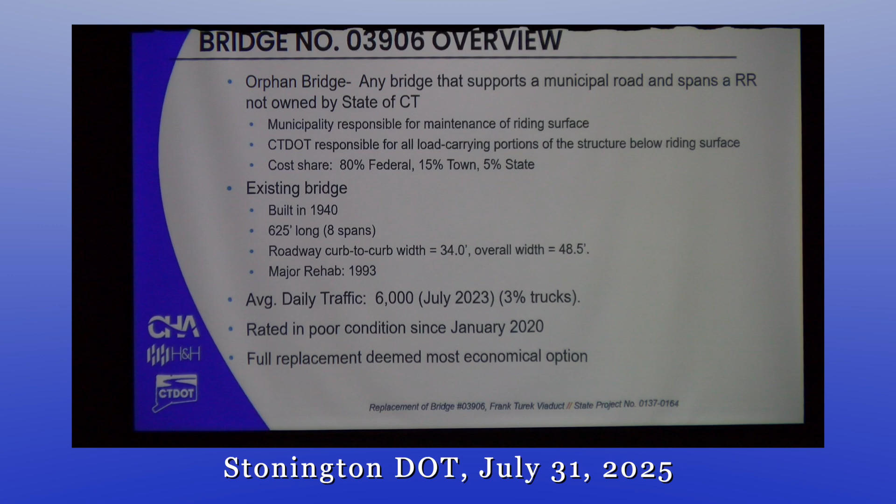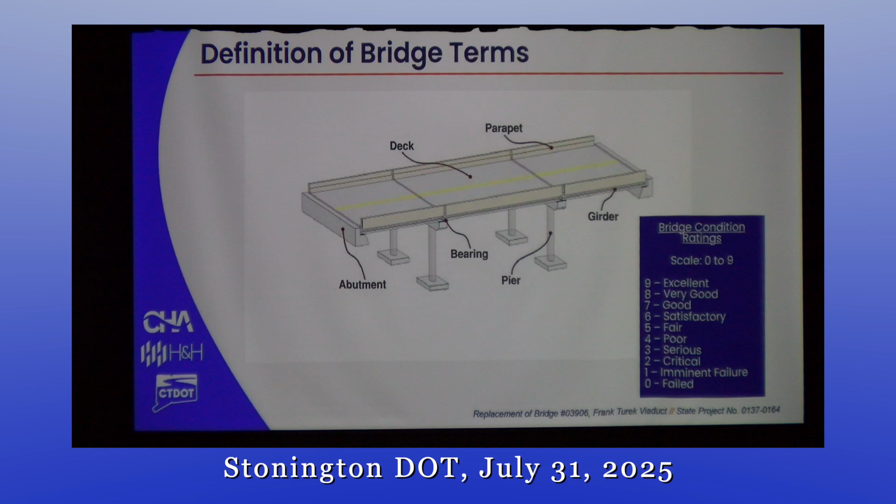I'll cover some bridge terms because I'm going to touch on those briefly. There's a diagram showing some of those major terms. The deck is what you ride on. The parapets are what keep you from driving off the road. The piers are what holds up the superstructure, and that's the part that supports the deck. And then the abutments are at the end. It's rated on a 0 to 9 scale, with 9 being excellent and 0 being completely failed. A 4 is poor, and poor again is still safe, but it needs work.

The purpose of the project is to address all the deficiencies affecting the bridge, so it will continue to provide safe and functional passage to all the users above and below the bridge. We need to address the deficient substructure, increase the load rating factors, address the vertical clearance limitations, update the roadside safety systems to current standards, and keep travel over the bridge, including during construction. Ensure that the bridge itself is safe for now and the foreseeable future, and minimize the need for future maintenance. After this, we don't want to be back anytime soon.

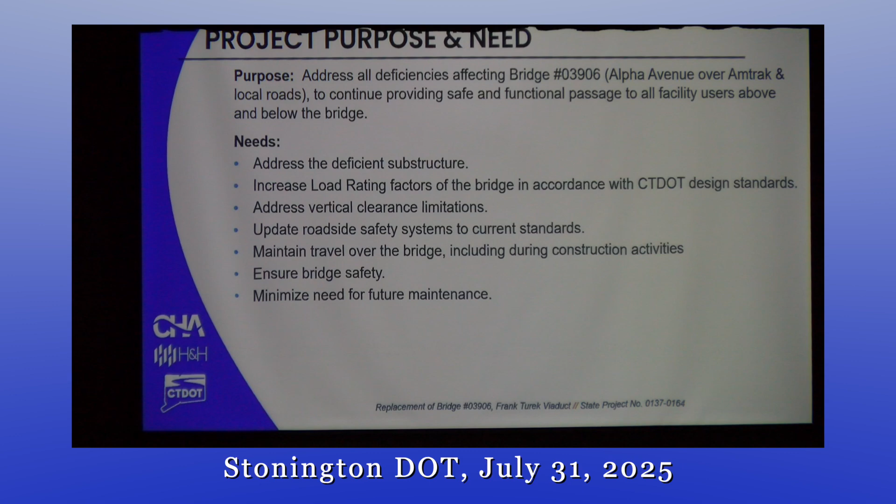The existing conditions on the bridge deck: the overlay is in satisfactory condition. The deck is rated as 7, which is good, but that's based on a little bit of guesswork, because when you have an overlay over a bridge deck, it's hard to judge the actual condition of the deck. You can't really tell until you strip the overlay off. But there is some water seeping through the deck. That's the efflorescence you see in the bottom photo. That means water is seeping through the bridge deck, and water going through the bridge deck can corrode the rebar which holds the deck together.

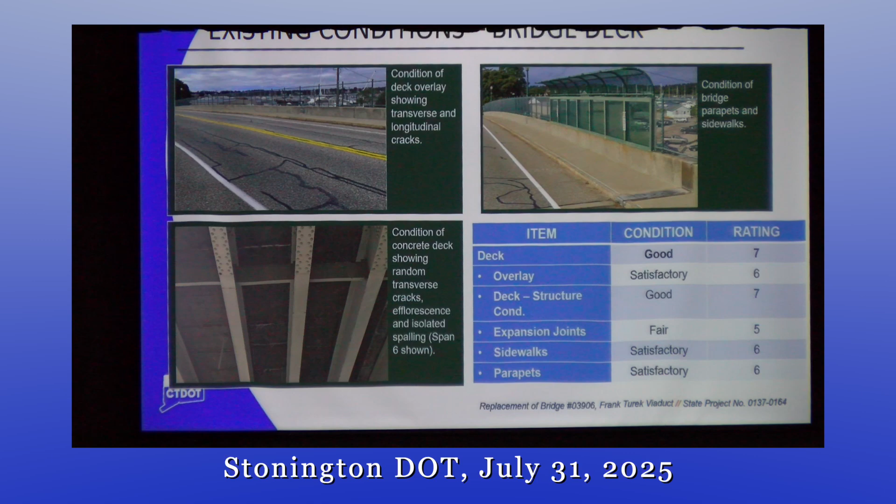The superstructure is in fair condition. That's one step above poor. There is damage to the girders caused by arcing from the Amtrak catenary. There's isolated corrosion damage. There's enough section loss to drop the rating to fair. And in about 10 years, the bridge is likely to become poor. So we want to address the bridge now before it becomes in poor condition.

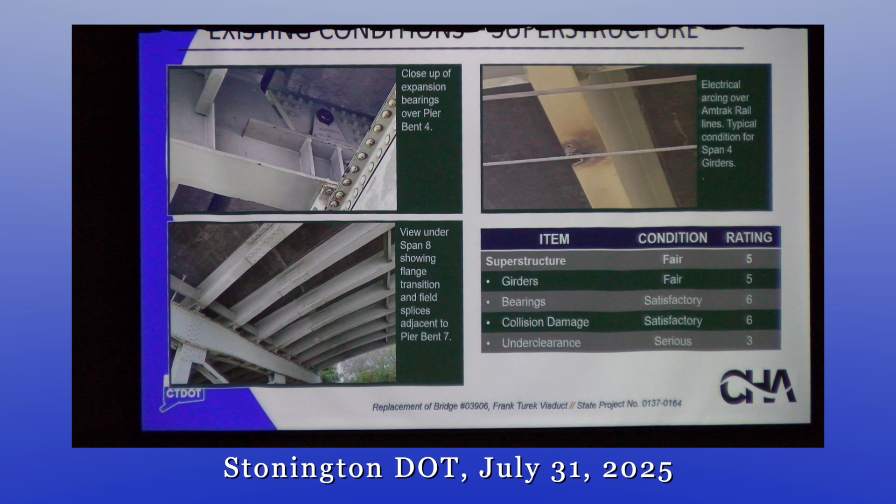The substructure is really what's driving the project. There's a lot of corrosion on the piers, and those are original 1940. The superstructure and deck, I believe, were replaced in the 1993 rehab. But right now, the original components, the piers, are what's failing at this point.

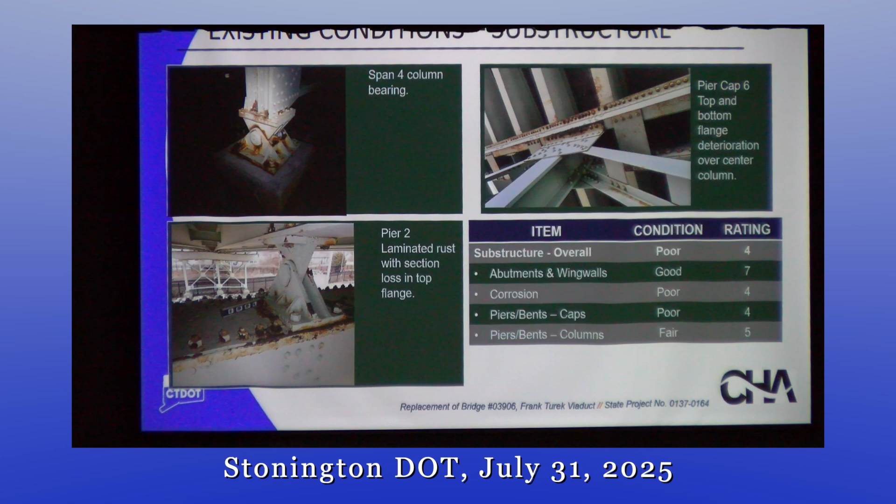It's a little difficult to compare a lot of these options because we spent about 4 years from the start when the bridge was identified in poor condition till now. So I had to adjust some of these numbers for inflation because a lot of the early options we looked at dropped and we added new options later on, so I had to kind of equalize their cost in dollars as of February 2025.

We had an initial rehabilitation study report, and in that one, it looked like alternate 4 was going to be the best option. Unfortunately, alternate 4 would require the closure of Main Street and Cutler Street where they cross under the bridge.

The reason why it's so much cheaper than the other options in the long haul is because it would be a much shorter bridge. It'd be only 200 feet long. But when we met with the town, they said the impacts of closing the roads would be unacceptable to the town. So we went back to the drawing board and we came up with alternate 5, which still assumed that we were going to use alternating one-way traffic to handle traffic during construction.

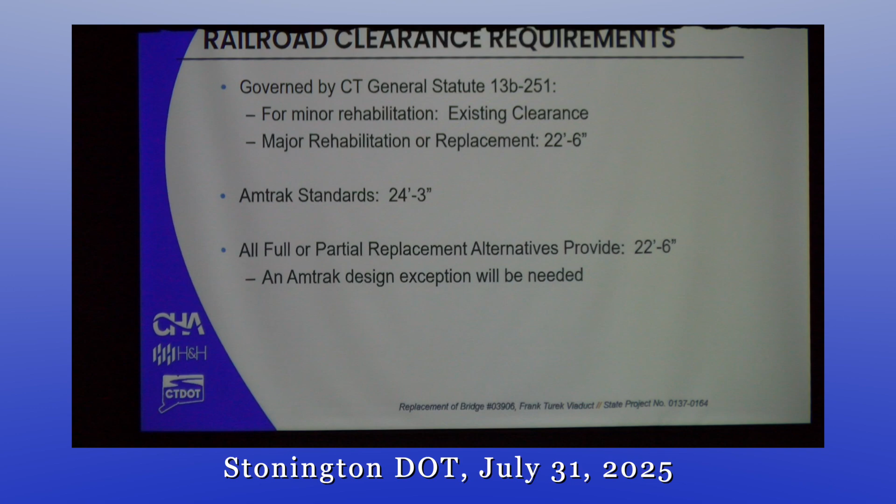Yeah. Can everybody hear me all right? Okay, I'm going to bend over then, I apologize. I guess I'm holding it.

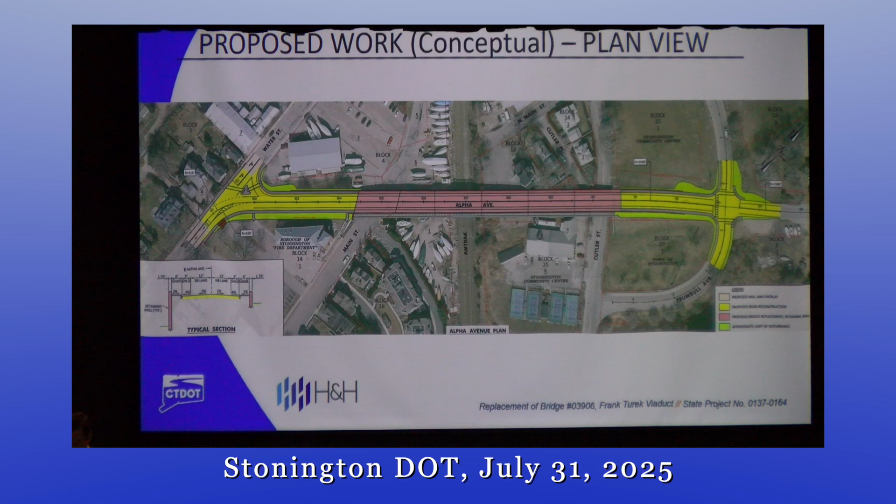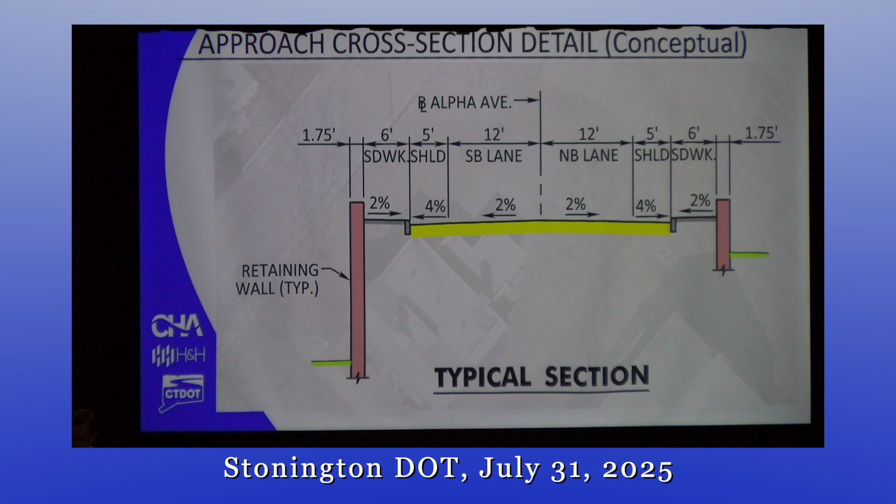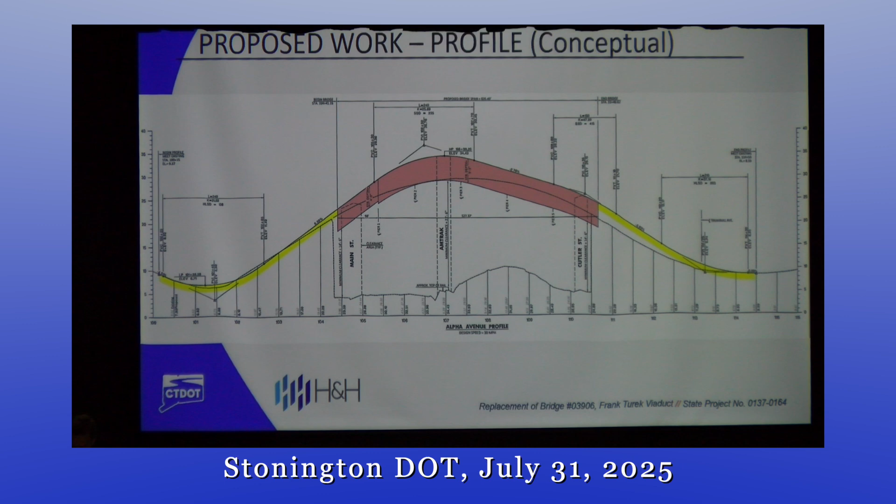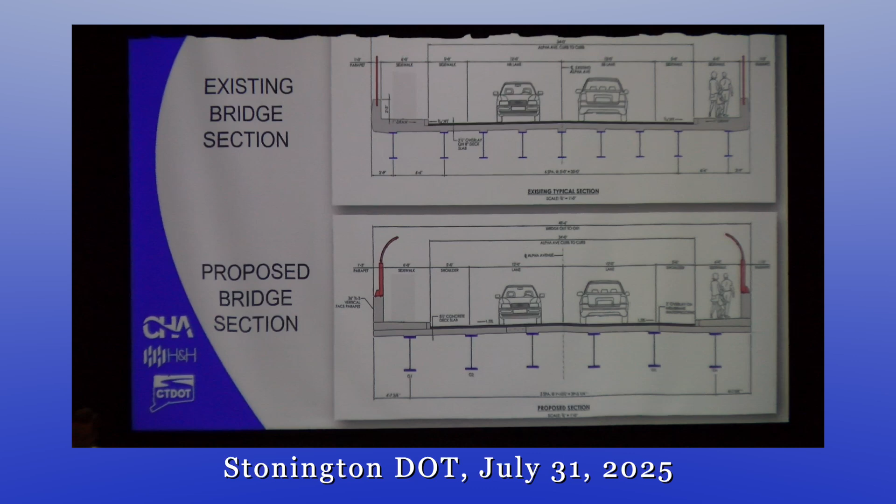And as I stated, the footprint of the existing bridge is going to be roughly the same as the proposed. It's just shifted 12 feet to the west. And that's mostly to accommodate the needs of maintaining a lane of traffic in each direction through the duration of construction. 12 feet or 12 days? 12 feet.

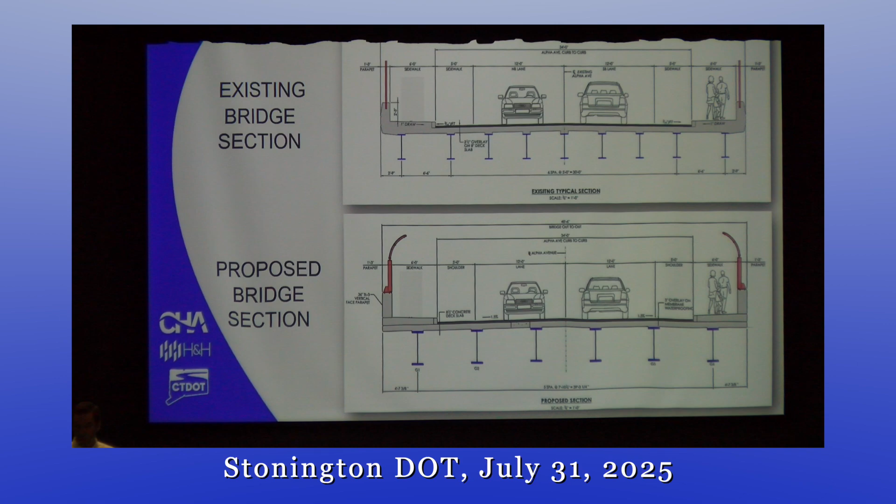Thank you, Brian. For bicycle and pedestrian facilities, the design meets or exceeds all Connecticut DOT complete streets requirements. For sidewalks, it would require a 5-foot minimum sidewalk with marked crosswalks. We are proposing to have 6-foot sidewalks on both sides, which is the same as existing, with marked crosswalks and illumination where the crosswalks are. There are no transit facilities within the project limits, but the bridge piers will be located to provide room for a potential Shoreline East train station. There was a feasibility study a while back.

To select the bicycle facilities, we had some questions about how the bicycle facilities were chosen. We consider both the traffic volume and the posted speed limit. Alpha Avenue is anticipated to carry 6,400 vehicles per day in the design year, which is 2047. The posted speed limit is 20 to 25 miles per hour. For that combination of volume and speed, because there are no bike lanes in the area, a paved shoulder meets the guidelines.

For bicycle and pedestrian access during construction, the stage construction that we're considering would require closing the sidewalks to use the sidewalks as travel lanes so we can shift the traffic over. So two options are under consideration to handle pedestrians while those sidewalks are closed. One is a detour to Elm Street, which would require the addition of ADA compliant ramps to the Elm Street pedestrian bridge, and also filling in a short section of sidewalk along Cutler that's currently missing.

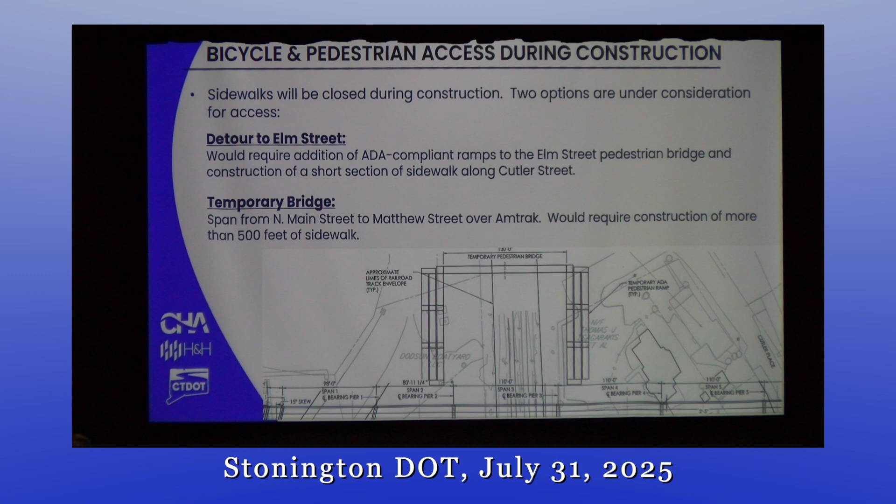The other option is a temporary bridge which would span from North Main Street to Matthew Street over Amtrak. That would require construction of more than 500 feet of sidewalk. Because there's an accessible route now, meaning a hard surface route, we need to provide a hard surface route that is equivalent to what's there now.

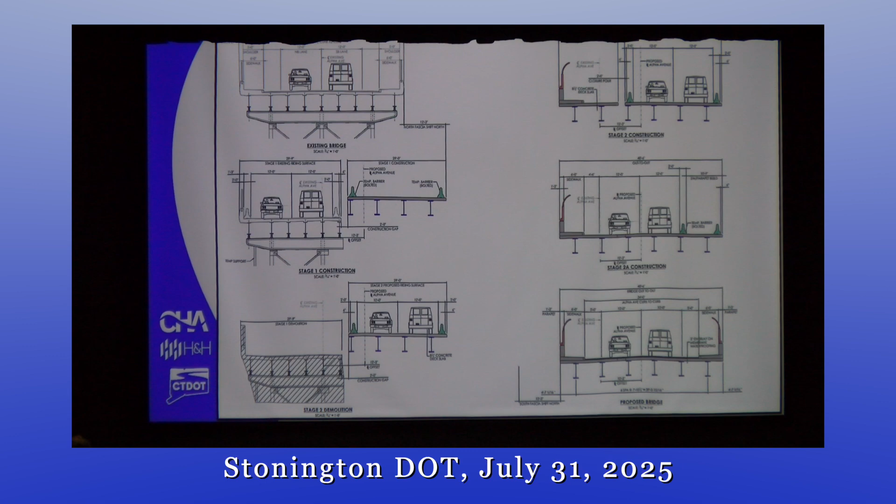Construction staging. The north side is sometimes also referred to as the west side because we call the project as running north to south, but it's really at an angle. Initially, we would start construction by shifting traffic over to the east side of the bridge, demolishing the west third of the bridge, building a new bridge alongside there, and then we shift traffic over to the new section, demolish the remaining portion of the bridge, and put traffic back on that structure.

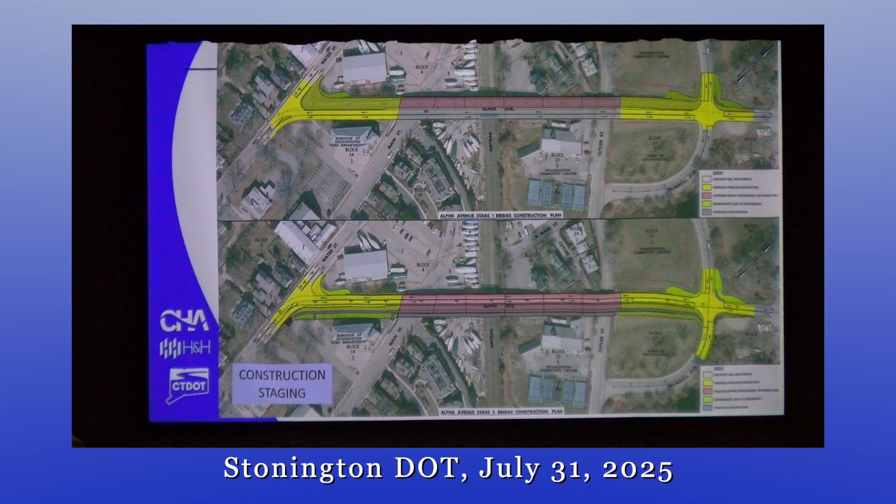There are several considerations, as I mentioned earlier. The initial designs were based on alternating one-way traffic during construction. We also looked into reopening the Water Street grade crossing, but it was requested and denied by Amtrak. Local emergency officials expressed concern with the traffic backups that we would have during alternating one-way, which led to taking traffic counts in July of 2023 and then some modeling based on those counts.

Alternating one-way traffic would simplify the project. We wouldn't need temporary pedestrian accommodations, and it would reduce some rights-of-way impacts because the final bridge would end up pretty close to where it is now instead of shifted over 12 feet, but it would have very severe traffic impacts.

With alternating one-way traffic, all movements at both intersections, that's Trumbull Street and Water Street, would have level of service F. Now, level of service is like grades on your report card. They go from A through F, and F is failed. That's all turning movements, going straight, turning right, whatever. Level of service F. Delays up to 5 minutes, traffic backups up to 1,600 feet. And the person who modeled this warned us that when the backups get like this, the model gets a little hard to predict because then they start backing up traffic at adjacent intersections and everything ends up in gridlock.

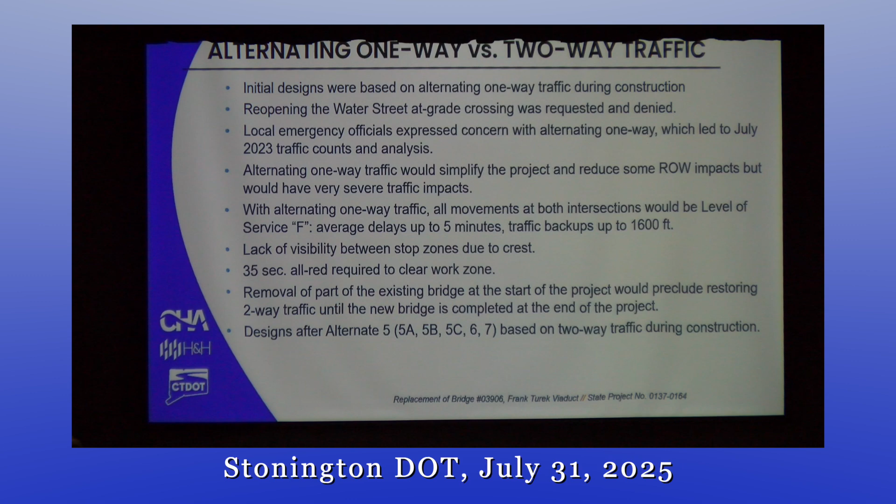Right-of-way needs. The property for the original bridge project was purchased by the New York, New Haven, and Hartford Railroad. This bridge was actually built as part of a grade crossing elimination program. Apparently it was a joint venture; it was federally funded, Connecticut DOT administered the project, but the railroad actually bought all the rights-of-way. And after the project was over, they retained it. Once the bridge was built in 1940, the bridge was turned back over to the railroad to maintain. Subsequently, the railroad went bankrupt, which is how it became an orphan.

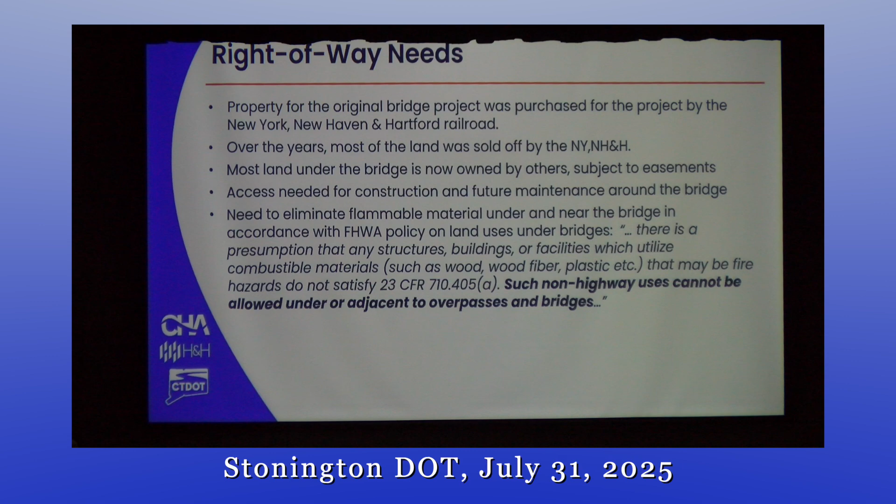Access is needed for construction and future maintenance under and around the bridge, and there's a need to eliminate flammable material under and near the bridge in accordance with FHWA policy, which you have to follow if you're using federal dollars on a project. And the FHWA policy assumes that buildings or anything flammable under the bridge is incompatible with highway use and should be removed from the rights-of-way. Now I'll introduce Kathleen Erickson to talk about rights-of-way.

Thank you, Stan. So again, my name is Kathleen Erickson, and I'm a project coordinator with the Department's Division of Rights-of-Way. Our office is responsible for acquiring property rights that are needed for transportation projects all throughout the state. So I'll be giving you a brief overview of what the acquisition process looks like. Before I get further into that, though, I just want to start off by going over the definitions of some common right-of-way terms. So first we have easements, and these allow the department to use property for a specified purpose, but the property owner will still own the land.

A common example of this is a slope easement, where the department would use property to build a slope to support the roadway. Next, we have temporary construction easements, which allow the department to use property temporarily for construction activities, but then these are released upon the completion of the project. And finally, we have permanent acquisitions, which is when the department will purchase property, either in part or in total, and own it outright. When you're looking at construction plans or property maps, these areas are typically labeled as taking areas.

I do want to mention again too that the property impacts for this project are still being finalized, so they could change as the design progresses. Also, any property rights that are acquired are done so in accordance with Connecticut General Statutes, sections 13A-73 and 13A-98E, as well as the Uniform Act.

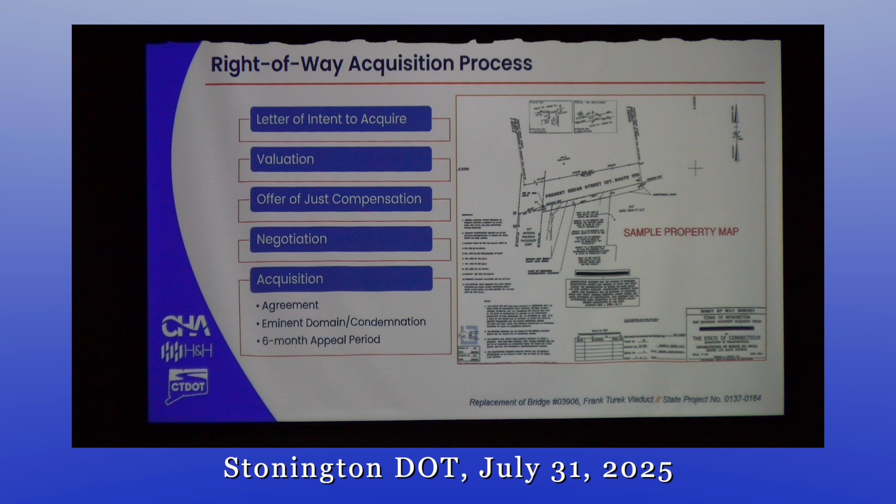Now, as you'll see with this project, the design may require the relocation of businesses or nonprofits, so I just want to quickly touch on the relocation benefits that are available. Each displacee is entitled to advisory services, as well as reimbursement for moving and related expenses. Also, businesses and nonprofits are eligible for reimbursement for some reestablishment expenses as well. A relocation specialist will also be available to meet with displacees during the acquisition process and discuss these benefits in more detail and how they pertain to their particular situation.

And I do again just want to reiterate that the property impacts for this project are still preliminary, and the department will continue to coordinate with property owners and look at different options at potentially decreasing impacts as the design progresses. But if anyone has any questions regarding the right-of-way acquisition process, I'm happy to answer them during the Q&A portion of tonight's meeting. I'm going to turn it back over to Stan to get into the actual impacts. Thank you.

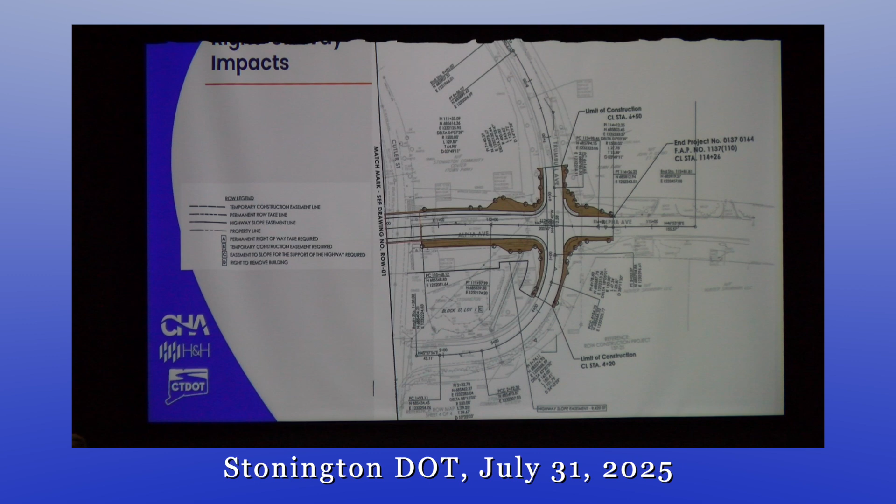Because we anticipate having cranes out there, we'll have to demolish the bridge, so you're going to have chunks of concrete falling, lifting out the old steel girders, moving in new steel girders. There's always a chance that something would be dropped, and we don't want people underneath that in structures or otherwise. So we have a temporary easement, so we have access to that area.

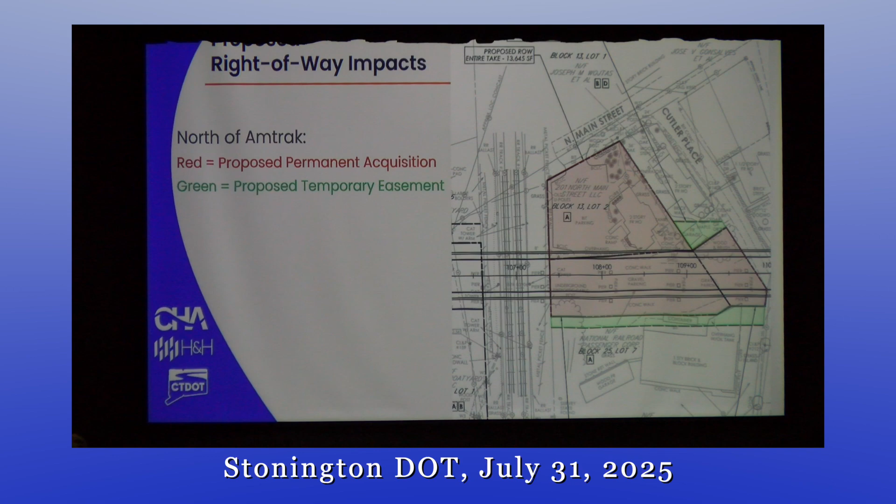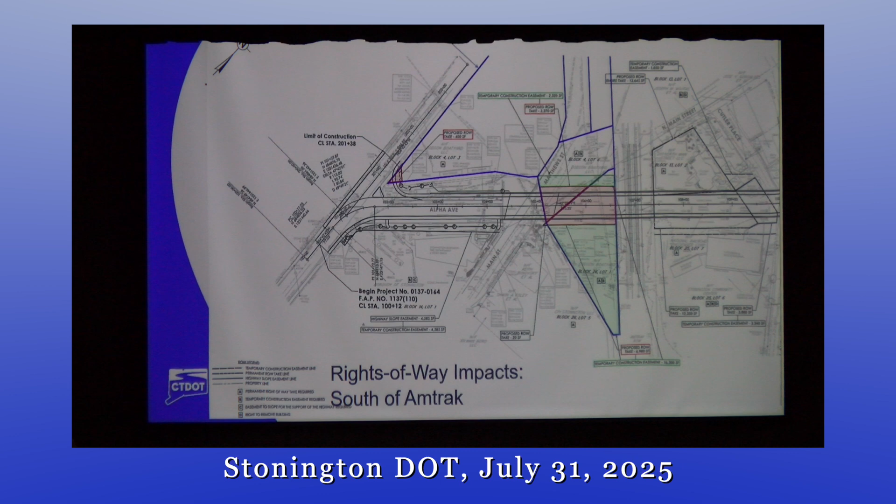So we will lease it from the current owner for the duration of the project, and then they'll get it back once the project is over. And DOT can give them a right-of-way underneath the bridge so that they can access that area.

Utility and drainage impacts: relocate overhead power lines. There's some telecommunications cables attached to the bridge now that we will move underground. We typically do that on all of our projects to make maintenance easier. Drainage impacts: the catch basins will need to be relocated. We'll do a drainage analysis to make sure the existing pipes are all up to current standards.

Natural resources: it's located in a FEMA special flood hazard area. It's listed as part of the Stonington Borough Historic District, but the bridge itself is not historic and it's not a contributing element. There are minor temporary impacts to wetlands related to staging expected, but for the most part we're trying to stay out of the wetlands. The wetlands have already been flagged. It is located within the coastal area, not in an aquifer protection area.

Anticipated permits are all from Connecticut DEEP, or mostly from Connecticut DEEP: inland wetlands, stormwater, Army Corps of Engineers self-verification, and possibly a coastal area management if we don't need a DEEP inland wetlands general permit.

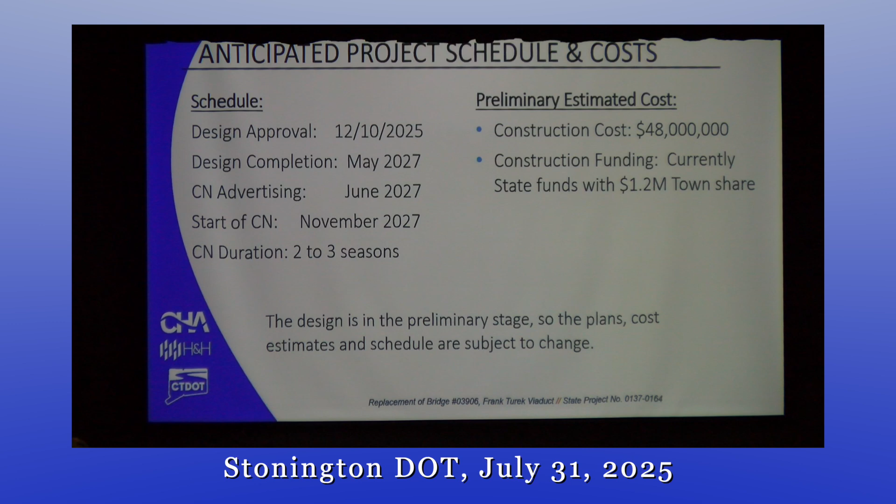The design is in a preliminary stage, so all of this is subject to change. The plans, the cost estimate, the schedule, all is subject to change. You can reach out after the meeting by email, by phone, or on the project webpage. You can also join us for informal discussion, but now we're going to open the floor for comments from the public.

All right, so we are going to have the borough warden. There's legislators too. One quick comment, there's a car in the parking lot with its lights on, a VW Beetle 1AL VG9, just a reminder. All right, so borough warden.

Good evening, everyone. Welcome. My name is Michael Sheffers, the Stonington Borough Warden, and I'm here tonight to share remarks on my behalf as well as those of First Selectman Danielle Chesebrough. Danielle regrets that she could not be here this evening. We understand how deeply personal this project is. When potential impacts to private property are involved, it's natural and right for people to ask hard questions and expect clear answers. As your local leaders, we are committed to working hard to ensure community needs are reflected through this process. We are optimistic that by all of us working together, we can have a project that results in a positive outcome for our community, both now and for future generations.